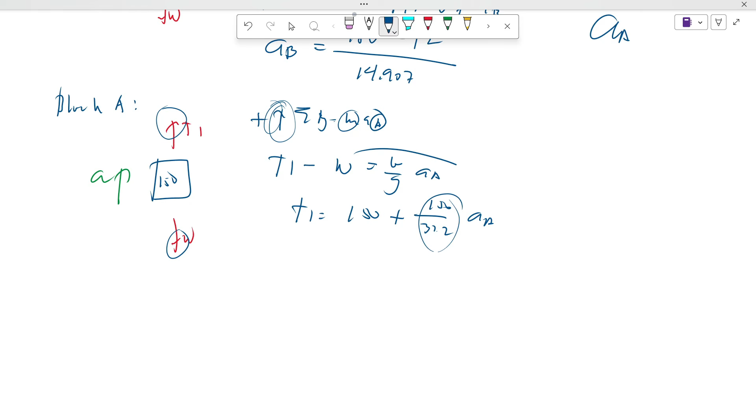Tapos yung AA boy, ganun pa rin. Ito, anong katumbas niyan? 150 divide mo ng 32.2 is 4.658. So AA is equal sa 100 minus T1 divide mo ng 4.658 guys.

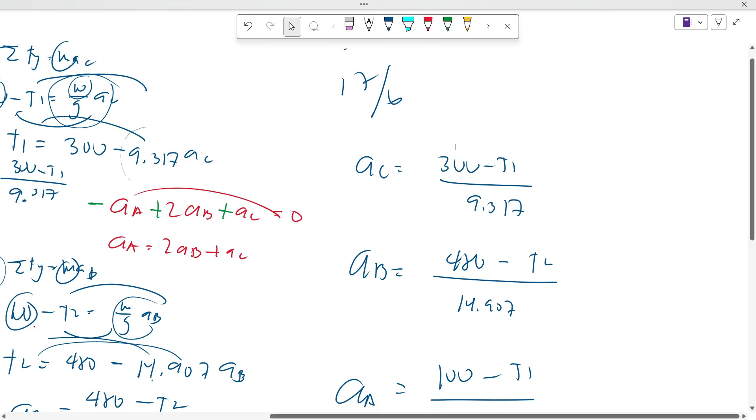Okay na guys. Tapos, ito, may acceleration relationship tayo, diba? AA equals sa 2AB plus AC. Sulpak mo lang yung mga values niyan dito guys.

So AA, ano yung value ng AA guys? 100. Tapos, separate mo na agad yung sa denominator, 4.658 minus T1 over 4.658. Wait lang, wala na, hindi na kasya. Diba guys, ito 100, separate mo lang yung mga denominator niya guys, isa-isa. Gets naman yun, diba guys?

So equals sa dalawang, ano yung AB natin? 480, separate mo ng 14.907 minus T2 over 14.907 plus AC, ganun din guys, separate mo rin siya. 300 over 9.317 minus T1 over 9.317 guys.

Gets pa ba? So 2 times 480 nga guys, ilan yun? 2 times 480 is 960. So palta ko na to na 960 guys, dinistribute ko lang yung 2 na. Tapos dito, madidistribute na rin, kaya may 2 na rin yun dito. So tanggalin ko na yung 2 niyan dito guys, no?

Gets pa ba? Tapos, kung mapapansin nyo guys, T1 to, T2 to, tapos to T1. So palitan natin to ng T1 dapat in terms of T1. So paano yan? Di ba meron tayong relationship ng pulley?

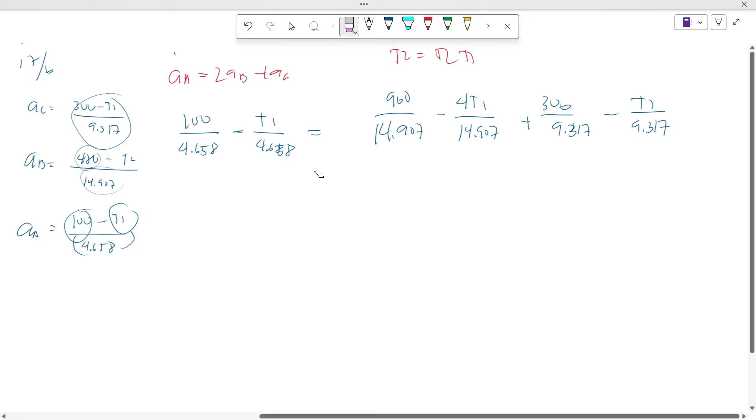So hello guys, so game. So from the AA, asan na yung AA guys? Ito AA. Wait, nagloko, ito AA, diba?

T1 minus natin sa 150, lipat lang to. So T1 dapat to, T1 minus 150. Nagkabaliktad guys, gets naman yun guys. Diba ito 150, tapos ito T1, lipat ko lang yung 150 sa kabila. So T1 minus 150 dapat to, over 4.658. So T1 minus 150 dapat to guys.

Buti, di pa tayo natapos. Yan, so bali, ito AA, which is ito yan. Palta ko lang ng 150. Ay, T1 to, T1 minus 150, ganun pa rin guys. Separate mo yung 4.658 guys. So ito naka-separate yung 4.658, diba? So T1, so gets pa guys.

Okay, gets, sorry nagkamali lang doon. So T1. So lipat sa kabila lahat, ito, na magkakasama yung T1. 4.658 plus 4. Tapos T1 over 14.907 plus T1 over 9.317 equals 960 over 14.907 plus 300 over 9.317 plus 150, ito guys, lipat mo rin to.

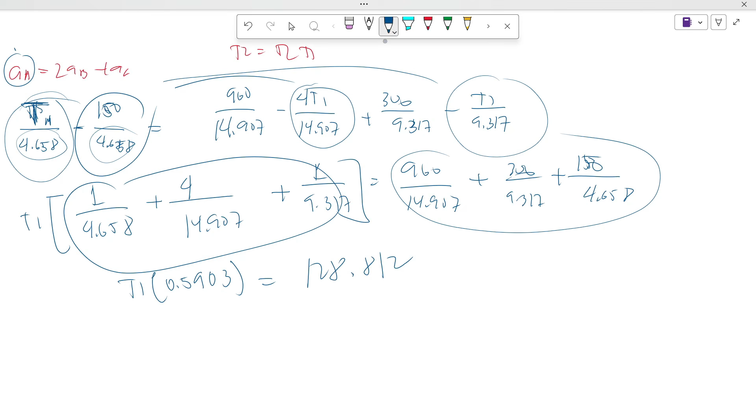So, 128.812 divide 0.59. So 3 decimals lang tayo. Tanggalin na natin to, no? So wait lang guys, T1, divide mo lang ng 0.590. 0.590, so 218.325 pounds, that is T1.

Kaso may relationship tayo na 2T1 equals sa T2. So to get the T2, multiply lang natin yan guys. 2 times 218.325, 436.650 pounds, yung T1 guys, insert mo lang yung value na 218 guys.

So mayroon na tayong T1 and T2. So ngayon, makakakuha tayo ng acceleration by substituting the values. Ito dito guys, oh. Ito, anong value ng T1 guys? 218.325 guys. So insert mo lang sa calcu 300 minus 218.325 all over 9.317.

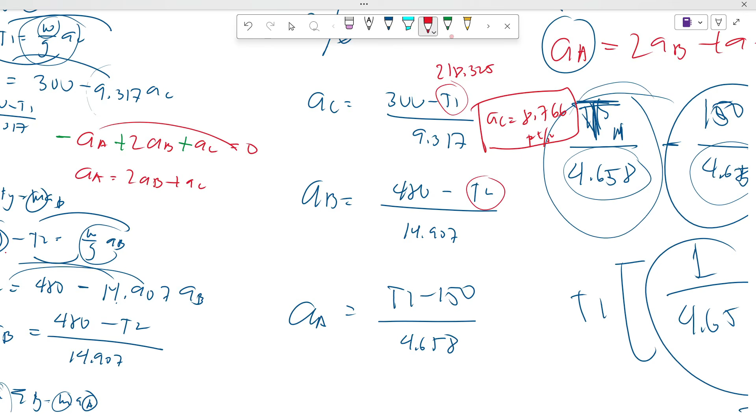Kung nagsosolve kayo guys, may discrepancy yan minsan-minsan sa mga decimal places, no? So yung T2, palta ko lang yung value ng T2 guys. Ano yung T2? 218.32, ay hindi, T2 pala. 436.650, ito. 436.650.

So the answer ng AB is 2.908 feet per second squared, guys. 2908, ayan. Tapos sa AA boy, insert lang natin yung value ng T1 which is 218.325.

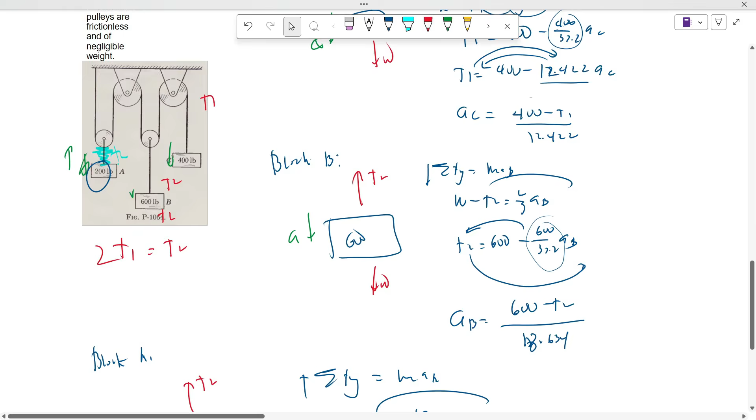Ito yung datum. Up to this point is SA, then isa pang SA, isa pang SB, SB din to. Tapos ito ay SC. So dalawang SA plus dalawang SB plus isang SC equals sa length.

Kunin mo lang yung derivative dyan guys. So 2AA plus 2AB plus AC equals sa 0. Yung assumption natin dito is what? Saan na yun? Dalawang AA, then dalawang AB.

Yung assumption natin dito, downward to, downward din to. So upward yung isa. Kapag kasi upward, di ba negative yun? Tandaan nyo to, yung downward to the right, downward positive. Upward to the left, negative. So sa madaling salita, ang AA, dalawang AB, at isang AC equals sa 0. Downward, downward, positive yan.

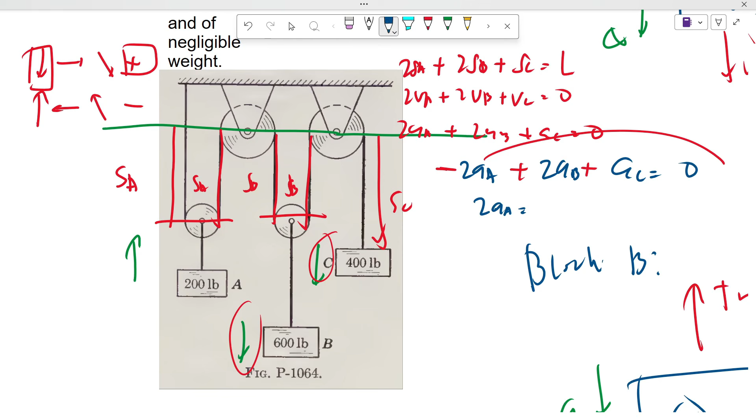B and C are positive. Then this one is negative. So lipat natin ito guys. Dalawang AA is equals sa dalawang AB plus isang AC. So ito na yung relationship. Tandaan mo yan.

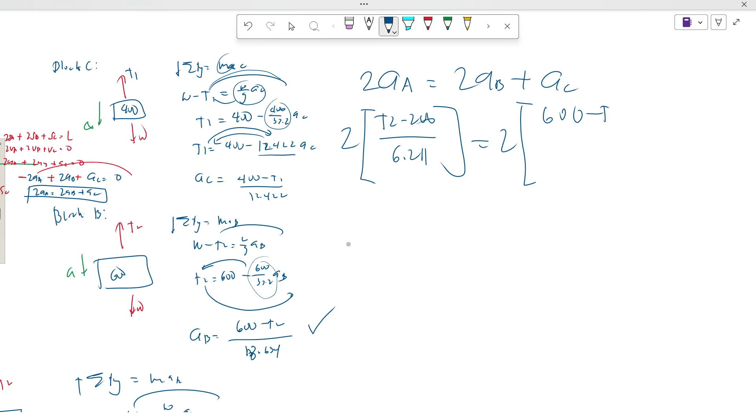Saan ba maganda sulat? Dito na lang. Ilan to? Nasaan na yun? Dalawang AA equals sa dalawang AB plus isang AC. Ano yung AA natin guys? Sulat mo niyan to: T2 minus 200 over 6.211 equals sa dalawang AB. Ito yung AB: 600 minus T2 all over 18.634 plus AC ito.

Huwag niyo maboxing sa test paper niyo ang mga pinagbabox ko guys. Ano to? 400. So separate na natin yung 12.422 now. 400 minus T1 all over 12.422. Ganon din dito, 18.634. Yan to. Tapos ganon din dito, 6.211.

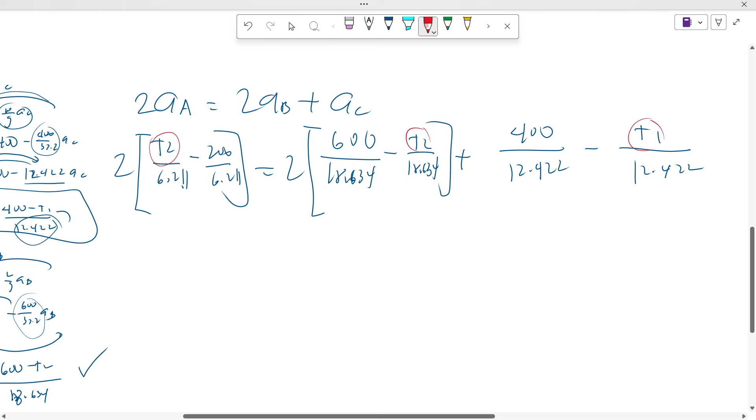Okay pa. So ito distribute mo lang din to. Dalawang T2 6.211 minus 400 over 6.211 equals sa 1,200 over 18.634 minus dalawang T2 over 18.634. Oops ano yun? Wait lang. Oops ayun, 400 over 12.422 minus tayo na 0.5 T2 over 12.422.

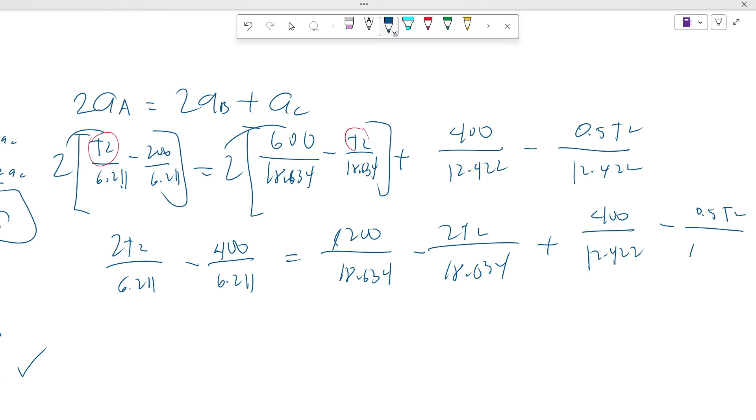Gets pa guys? Okay. So lahat ng may T, lipat sa kabila, lipat lahat dito sa kabila na magkakasama yung T. Sabay factor out na natin yung T now. Tapos ito, dalawa over 18.634 plus 0.5 over 12.422 equals yan sa, lipat mo to, 400 over 6.211, then plus 1,200 over 18.634 plus 400 over 12.422.

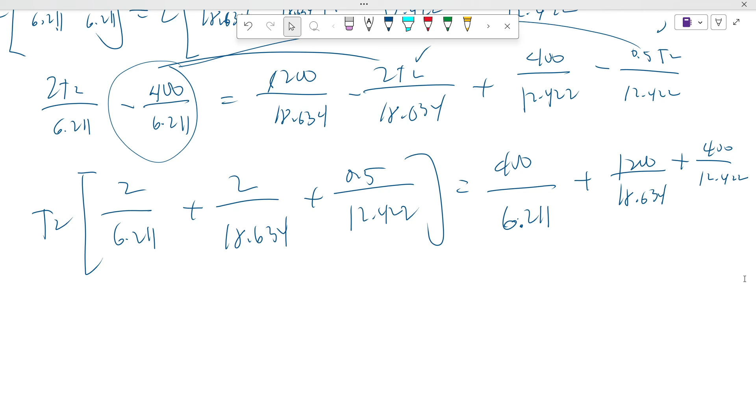So gets pa guys. So insert ko lang sa calc ito: plus 2 over 18.634 plus 0.5 over 12.422. So T2 is 0.470, is equals sa, insert mo sa calculator mo to. Ilan yan?

Wait lang guys, insert lang natin sa calculator. Huwag lang kayo mainip, sabay-sabay tayo mag-solve. 161.001 pounds. So divide mo na 0.470. Cancel to. T2 is equals to 342, T2 is 342.555 pounds. Ano sabi sa problem guys?

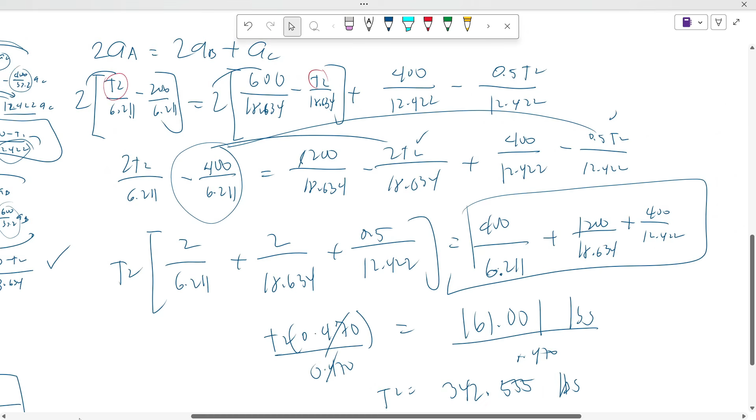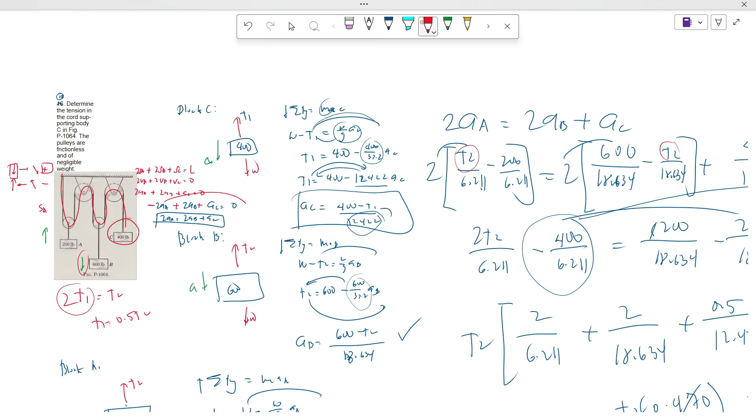Wait lang, nag-lock oh. Ano sabi sa problem? Determine the tension in the cord that's supporting the body C. Ito yung body C, di ba? Wait lang, burayin natin. Supporting the body C, sinabi. So T1 to, di ba? Lahat ng dinaanan na to. So ibig sabihin, T1 yung hinahanap natin. So anong nakuha natin? T2, which is hindi yan, dapat T1. So gamitin mo lang to.

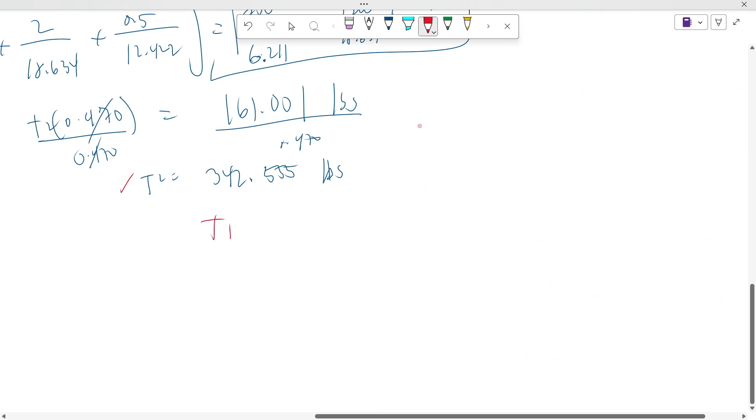T1 equals sa 0.5 T2. So T1 is equals to 0.5 times 342.555, equals 171.278. So ito na yung sagot guys.

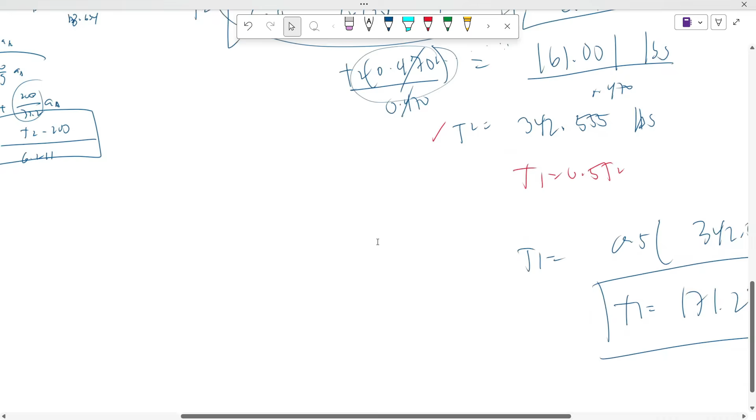Kung mapapansin nyo, may mga discrepancy lang yan kasi naka-fraction tayo dito. Nung pinraction yan, lumabas is 0.470 which is may karugtong pa yan, may mga numbers pa na magkakasunod, sobrang dami. Kasi dahil 3 decimal places lang tayo, gets ba yun? Sa tingin ko gets nyo na yun. So the answer is 171.278 pounds.

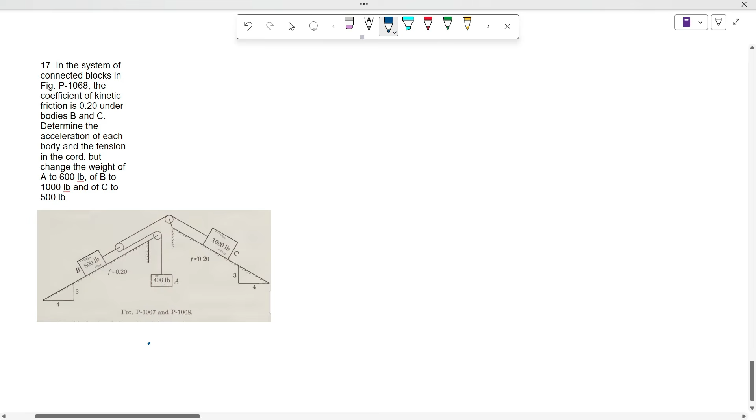Hello guys, so the last problem, in the system connected blocks in the figure P-1068, the coefficient of kinetic friction is 0.20 under B and C. Determine the acceleration of each body and the tension of the cord, but change the weight of A. Asan yung A? 600, B to be 1,000, and C is to be 500.

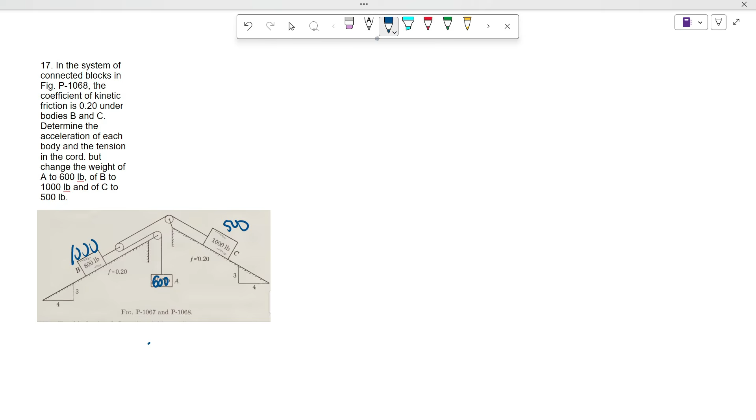So game, umpisa natin sa Block C. Sige, so assumption natin ng movement nila is downward to, ito upward. So kunin na natin agad yung relationship. Ito ay B, C, and A.

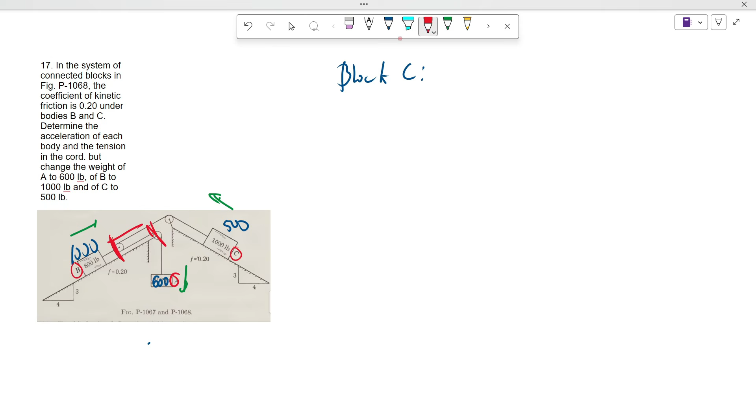From this point up to this point is what? Dalawang SB yan, di ba, from the fixed pulley, ito yung fixed pulley. So this point up to this point, fixed pulley din to, is SC. Tapos this point up to this point is SA, di ba? So isang SA plus dalawang SB plus isang SC equals sa length.

So kunin mo lang derivative niyan guys.

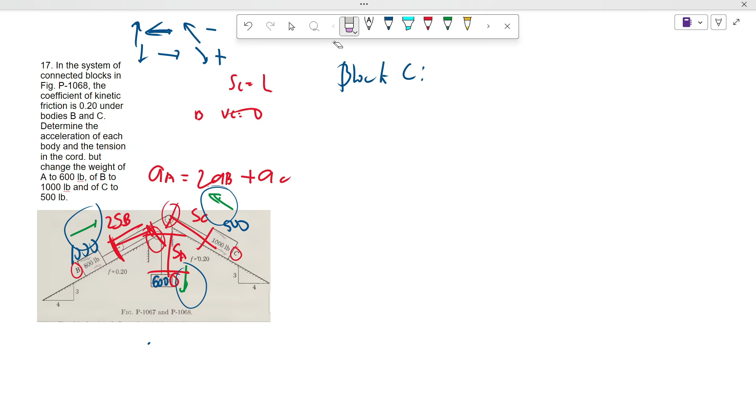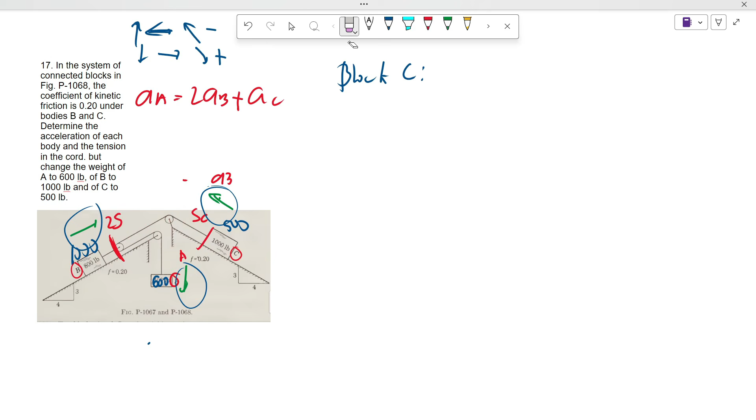Wait lang, linisin lang natin. Chill lang boy, linilinis ko lang.

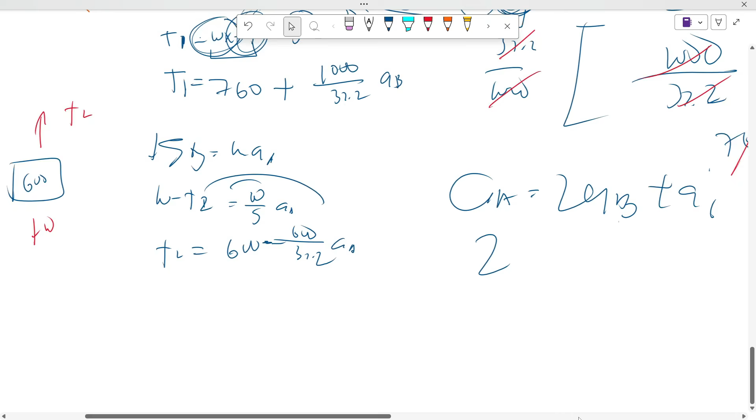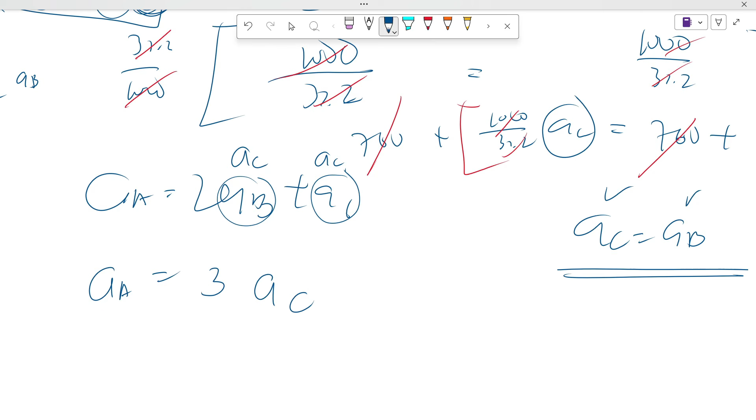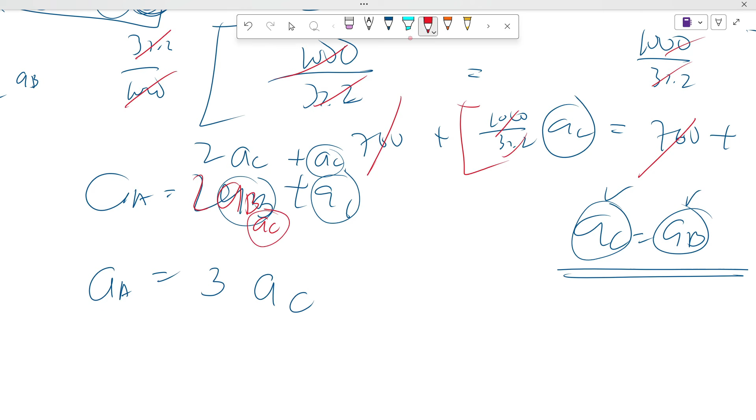AA equals 2AB plus AC. Wait, the slide won't move. AA equals AB, 2AB plus AC, in which AC and AB are the same. So in other words, our AC and AA - let's make AB equal to AC. So dalawang AC plus isang AC, kasi sinabi AC and AB are the same. So AB is equal to AC. So two AC plus one AC, that's three AC. AA is equal to three AC. Got it? Let's proceed to the next part.

So how do we get the acceleration? Let's proceed to what we got. T2 equals 380 plus 500 over 32.2 times AC. And then T1 is 760 plus 1,000 over 32.2 times AB. And lastly, T2 is 600 minus 600 over 32.2 times AA.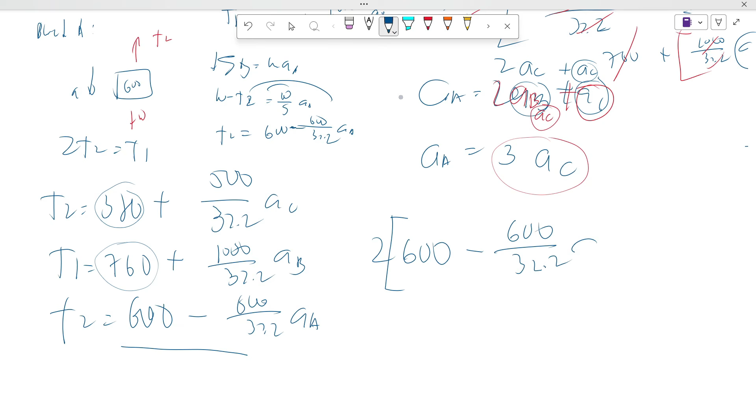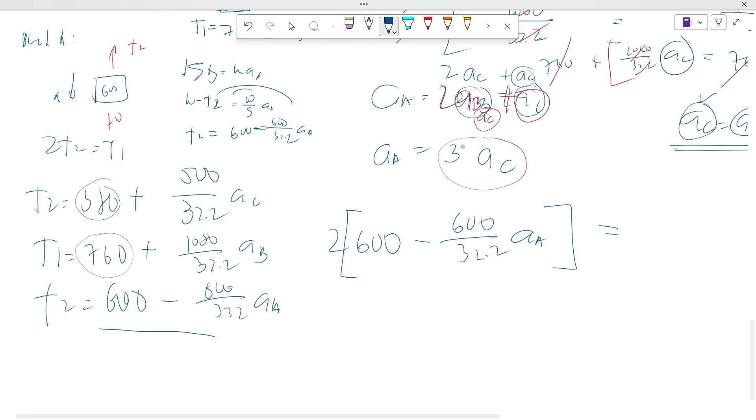So we have a relationship, right guys? 2T2 equals T1. Let's use T2 which is 600 minus 600 over 32.2 times AA - we multiply by 2 to cancel the 760. Then 2T2 equals T1, and T1 is 760 plus 1,000 over 32.2 times AB. So let's transfer terms: this becomes 1200 minus 1200 over 32.2 AA equals 760 plus 1000 over 32.2 AB.

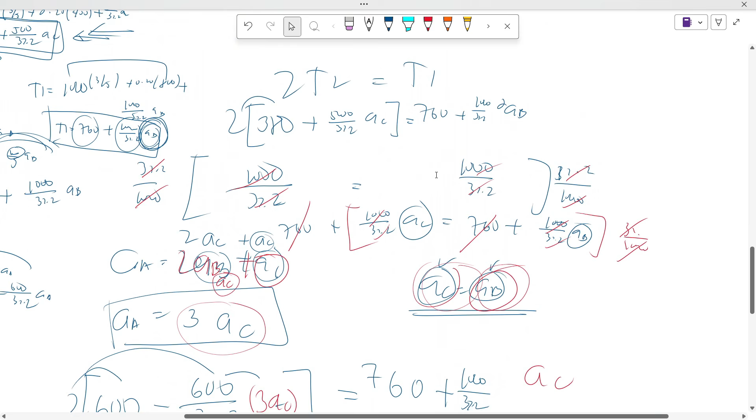The screen really won't zoom out. As the problem states, AC is equal to AB. So AC equals AB which is 3.08 feet per second squared. So now we have AC and AB.

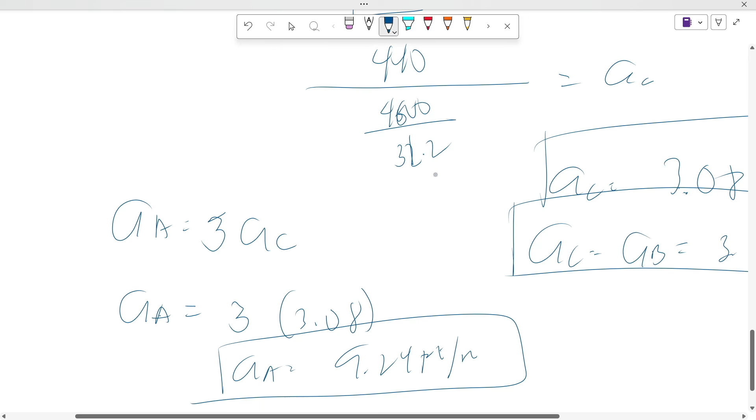So let's find AA. AA is equal to what? Three AC. AA equals three times AC, which is three times 3.08, that's 9.24 feet per second squared. Got it? So AA, B, and C are related this way.

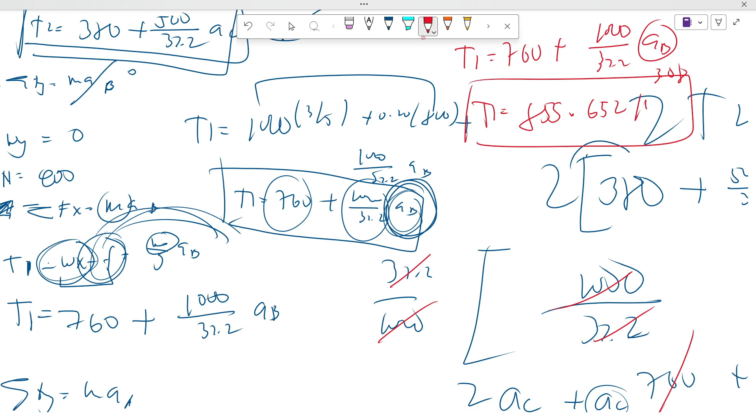But how do we get T2? T2 is equal to 0.5 times T1, right? Just divide by 2. Cancel. T2 equals 0.5 times T1, which is 0.5 times 855.652. So T2 is equal to 427.826 pounds. Let me repeat: 427.826 pounds - that is the value of T2.

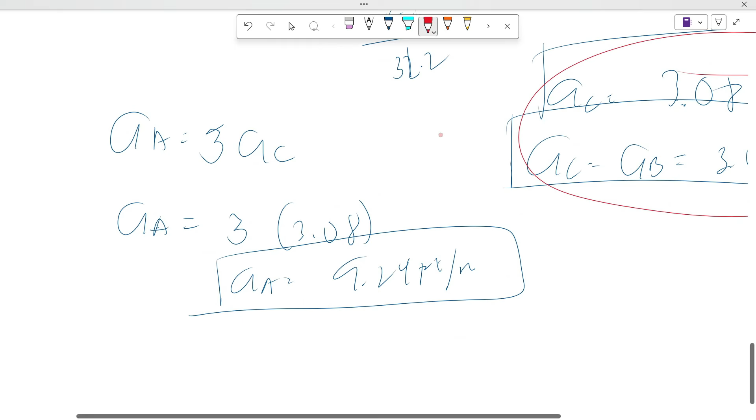Got it? So those are the values - T1, T2, acceleration of B and C, and acceleration of A. I hope that's clear. Those are the accelerations, as asked in the problem.

Let me read the problem: Determine the acceleration of each body and the tension attached in the cord. So the tensions 1 and 2 are what's being asked, then the acceleration of each body - A, B, and C. Got it? I hope you understood, guys.